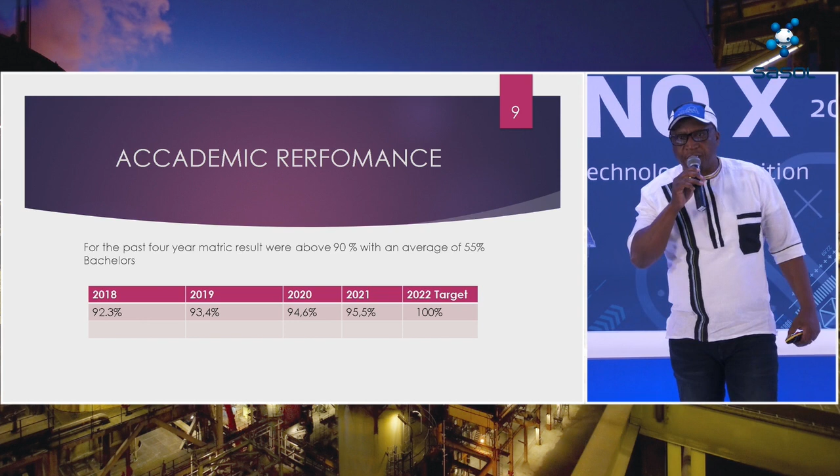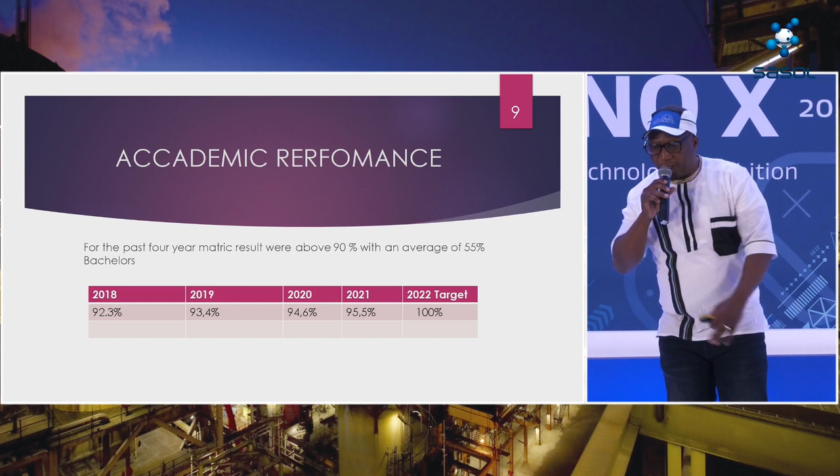Also, this advantages the school in terms of academic performance. For the past 4 years, we have been performing above 90%, with an average 55% bachelor's pass rate in our school. When you see the stats: in 2019 it was 93%, in 2020 it was 94.6%, in 2021 it was 95.5%, and we have realized that it's possible to go to 100%.

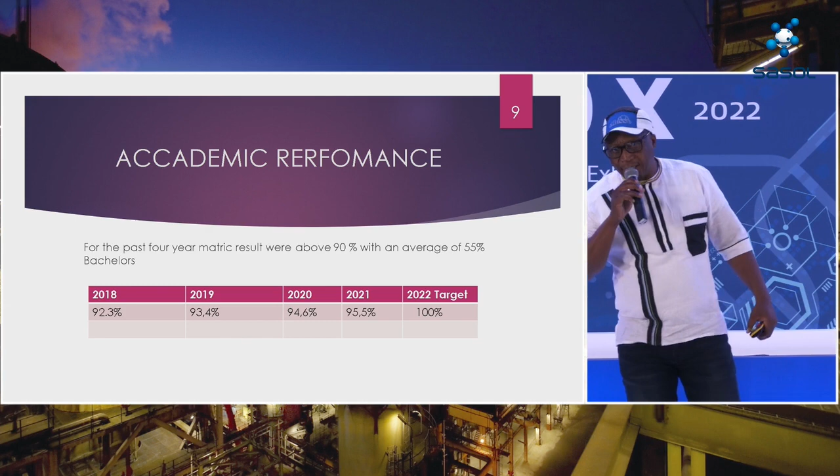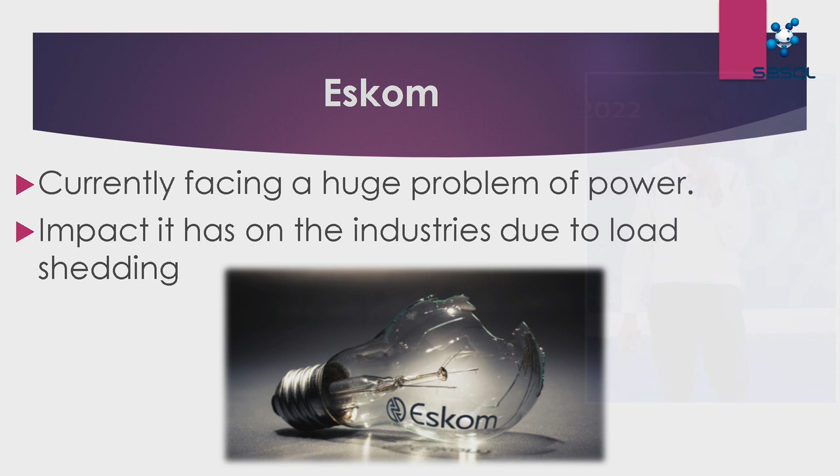As I've stated, in our country we are currently facing a huge impact from load shedding, and this affects industries that use electricity to function. It also has a huge negative impact on the economy, since people now tend to lose jobs because they arrive late at work, or sometimes don't make it to work at all, as it is our culture, black culture, to use trains to go to work.

Moving forward to our engineering goal, as this is an engineering project, our goal was to create a lightweight train that uses solar energy and moves at a certain speed. The speed of our train is 30 kilometers per hour, to avoid aerodynamic force. As you know, aerodynamics affects objects that move at 40 kilometers per hour and above, so our train moves at a speed of 30 kilometers per hour.

Now Nkwana Ridumezi is responsible for explaining to you how we started with this train, from the literature review, the procedure, the background information, and through to the real prototype. I would like to hand over to Ridumezi, who will explain more about the process of our train.

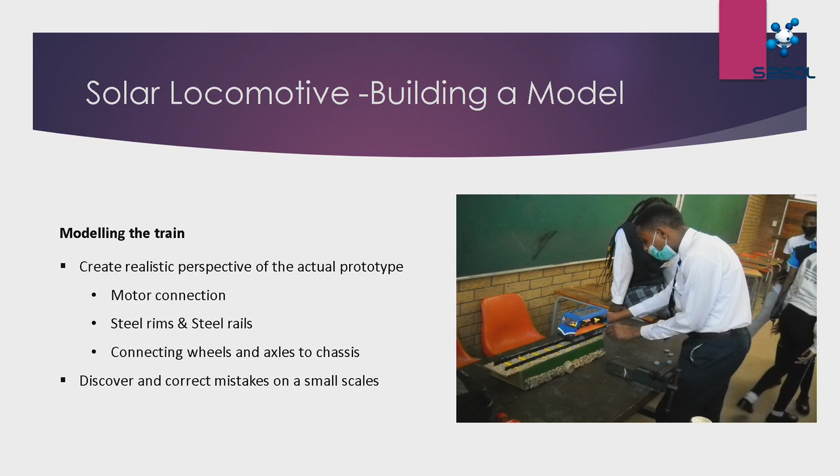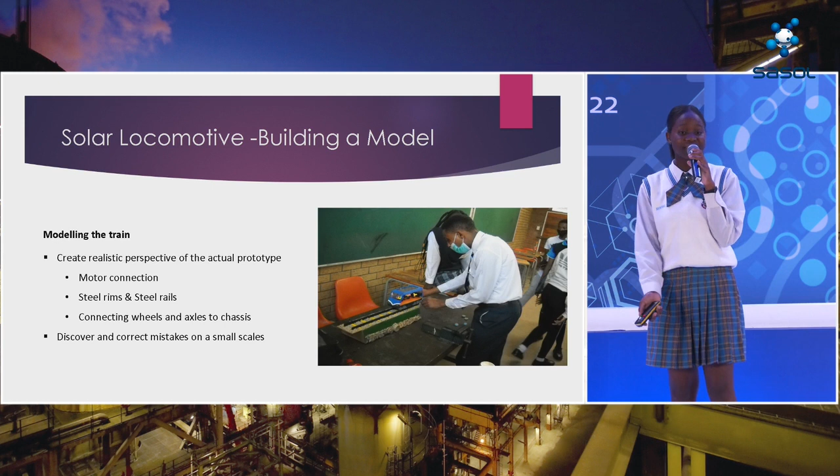In our research we also identified essential components that must be used in our solar locomotive: batteries, inverters, motors, motor controllers, chassis, and the body, and how the body should be constructed.

We identified that the most essential thing needed by our solar locomotive was solar panels, which use direct light from the sun for the photoelectric effect to take place, where electrons are ejected from the monocrystalline solar panel to produce electrical energy.

We also have the inverter, which converts electrical energy from DC current to alternating current, the type of electricity that flows in such a way that it alternates. We also identified the motor, which is the electrical component that converts electrical energy into mechanical energy.

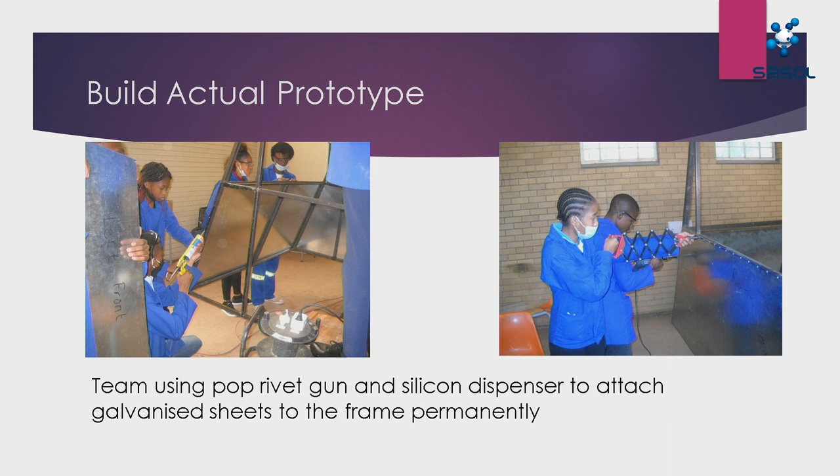We also built the chassis from scratch with our own hands. The chassis, which is the base frame of our solar locomotive, mainly consisted of the axles with differentials and steel rims and steel rails with less rolling resistance.

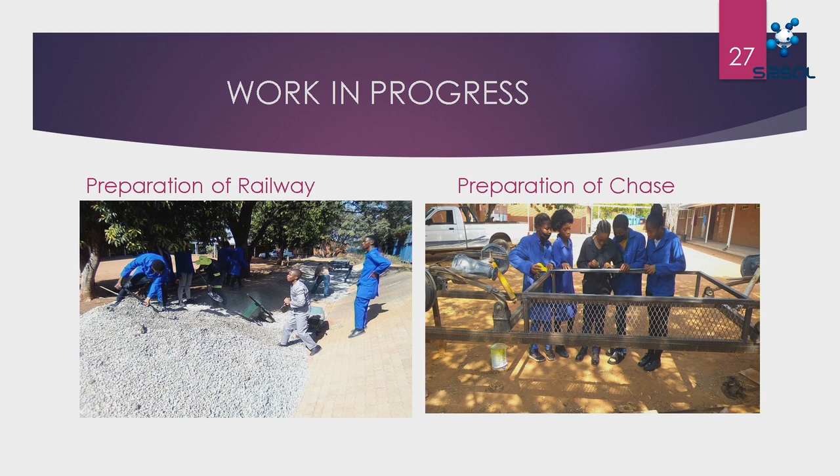We also have suspension, which is the mechanical system of leaf springs and shock absorbers connecting the axles and wheels to the chassis. Briefly, this is us working with the chassis in our school.

Briefly, let me tell you about the process of what is happening with our solar locomotive. Sorry for the inconvenience, we couldn't put the pictures on.

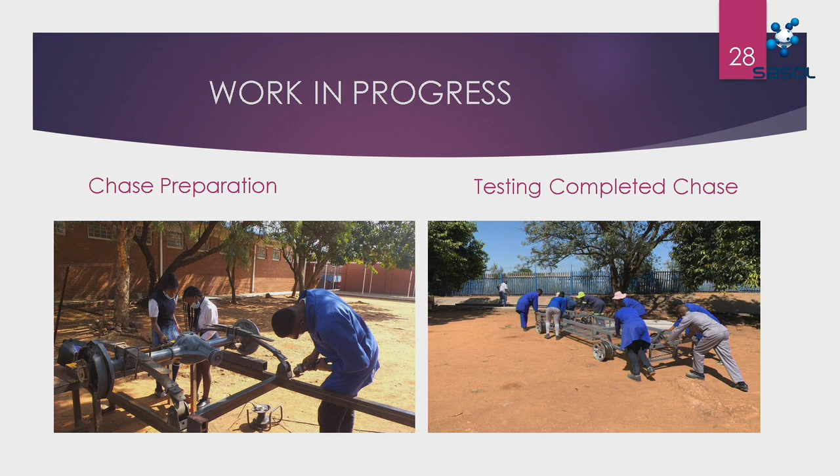The sun is mainly used as the energy source, but to us, we use this as our light energy for the process of photoelectric effect to take place, where electrons are ejected from the 4 photovoltaic monocrystalline solar panels of 390 watts each to produce electricity. Our monocrystalline solar panels are the most effective and efficient ones, and that's why we chose them.

The inverter is then going to convert the DC current from the solar panel, as we know the current from the solar panels is direct current which flows in one direction, and convert it to alternating current so it is able to charge the batteries of our solar locomotive.

When the 4 lithium ion batteries of 48 volts and 12,000 watts, our battery ratings, are charged, they will then supply electrical energy to the motor, where the motor will convert the electrical energy from the batteries into mechanical energy, providing the movement of our train.

We used 10,000 watt brushless or synchronous motors, which others call electronically commutated motors, which turn the wheels of our solar locomotive, as we know the job of the motor is to create movement.

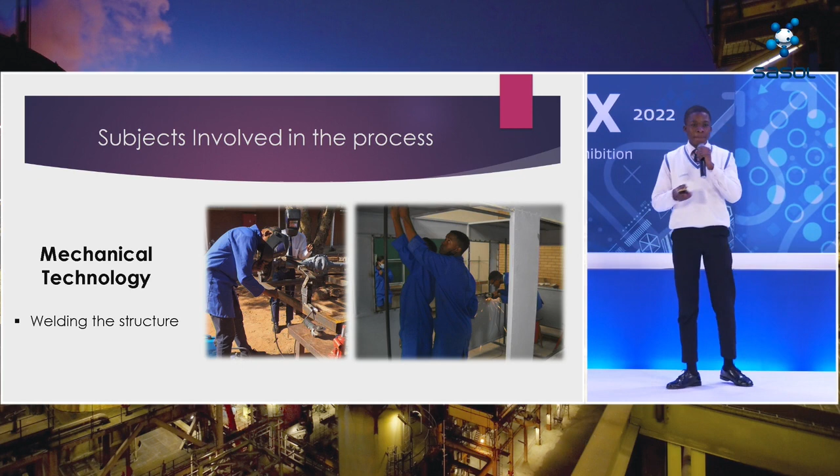Right? What we have here is the mechanical students came together in order to weld the structure of our train. Mechanical technology has also been used in the building of the chassis.

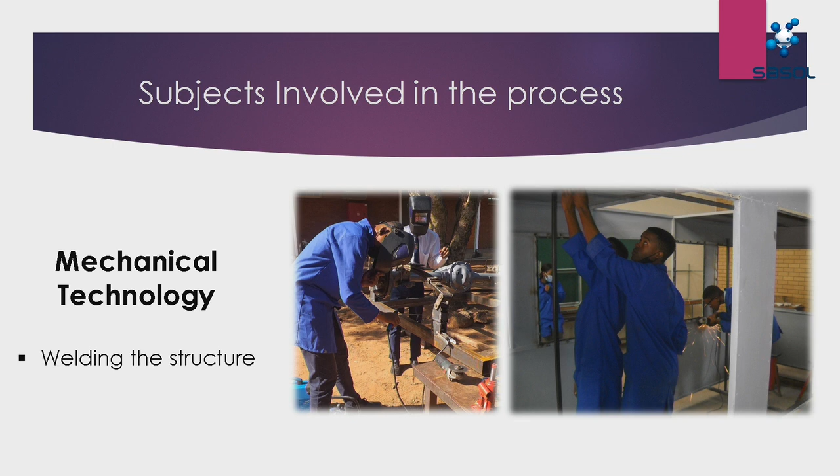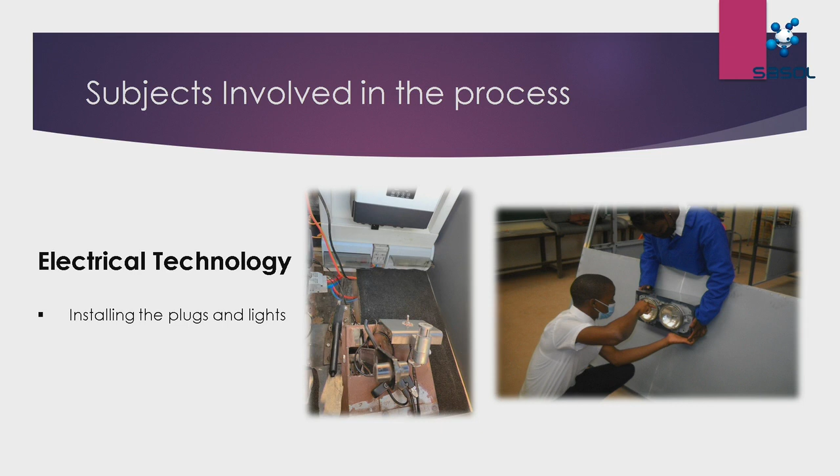Here we have students in electrical technology that had the role of doing the electrical connections of the train, including ensuring that the train itself has electricity.

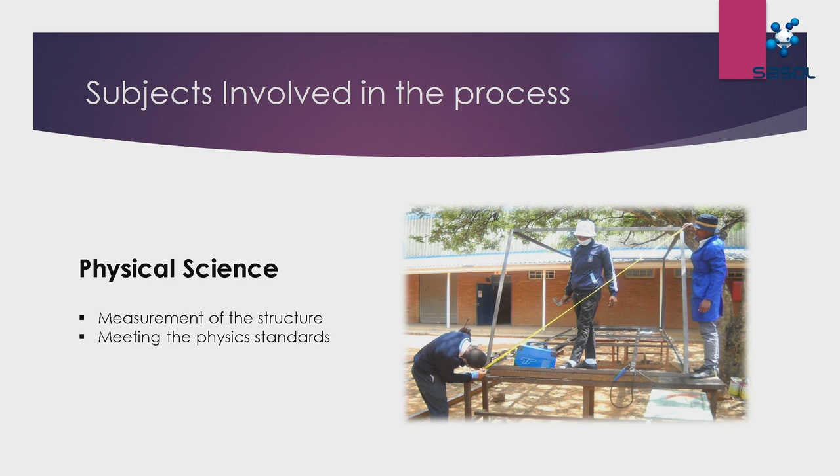We also have physical science that is important, used for weight distribution of the train, and also the identification of the forces acting on the train.

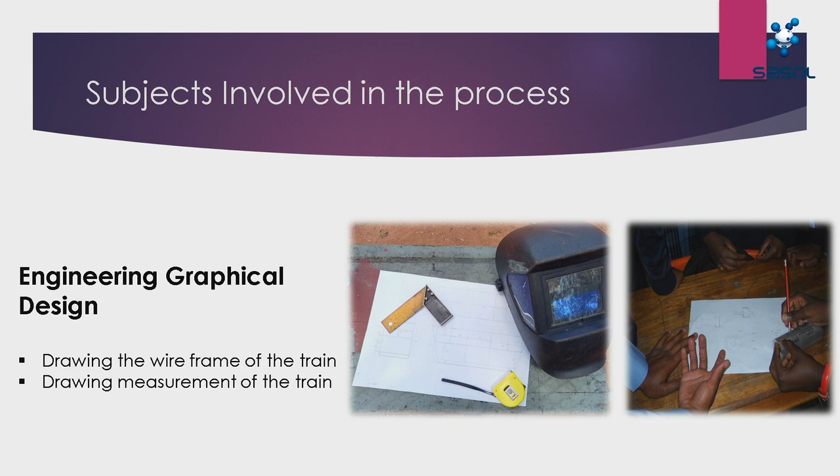Right? Then in order for us to have a clear picture of what it is that we were to design, we had to use engineering graphics and design in order to produce an engineering drawing that will then convey important information about our solar locomotive.

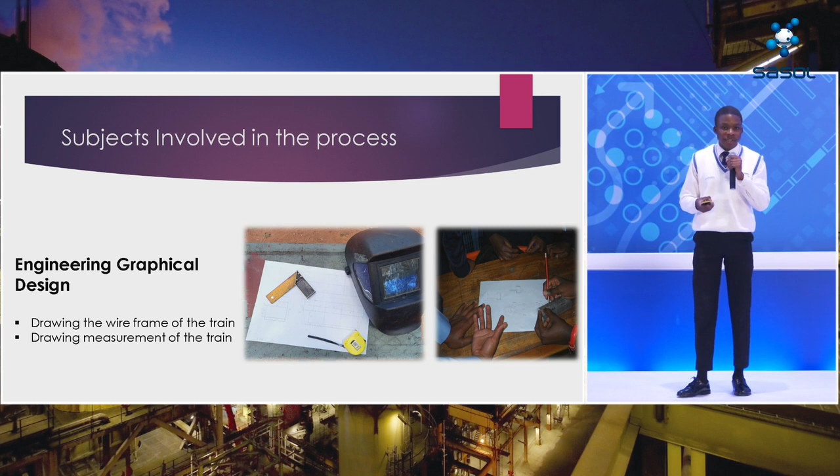So what happens is that we have been able to apply hands-on learning in order to produce our locomotive, or to come up with a solution. Basically what we have done is we have shown that whatever we learn in school can be applied in real life in order to solve some of the biggest problems that we face in the world.

Not only that, but to also enhance our lives. We have shown as students from Soshanguve Technical that it is all possible. And it all goes down to working together as a team.

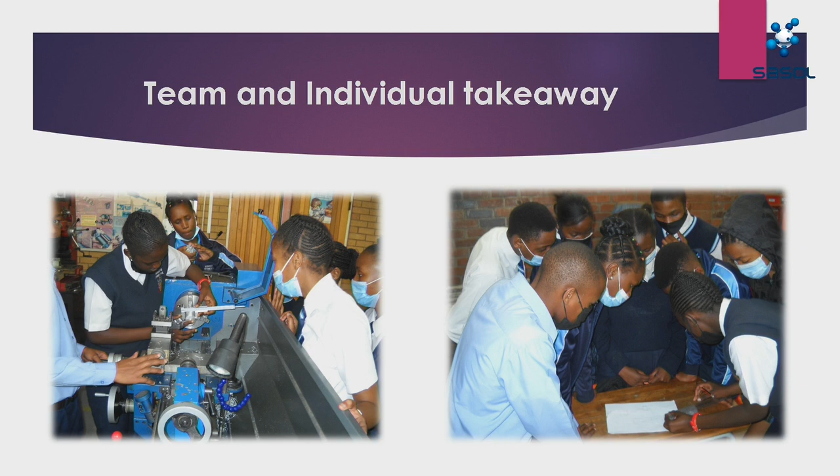Now, our takeaway is that we, as people, can combine together in order to tackle the problems that we are facing in the world. But it all goes down to being solution-minded. Now, being solution-minded is all about having an attitude of mind that is all about coming up with solutions to problems.

Well, as you have seen, that is all from the result of the combination of subjects from our school. Basically what happens is students from all their different subjects of specialization have come and contributed what they know and have learned from the subjects in order to produce this new solution.